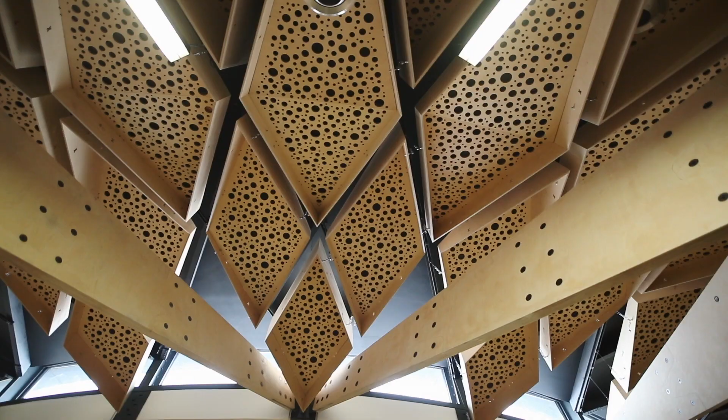At Future Africa, we supplied all of the fixed and most of the loose furniture in all the different areas, mostly the residential living units, and at the conference center we did acoustic paneling and tables.

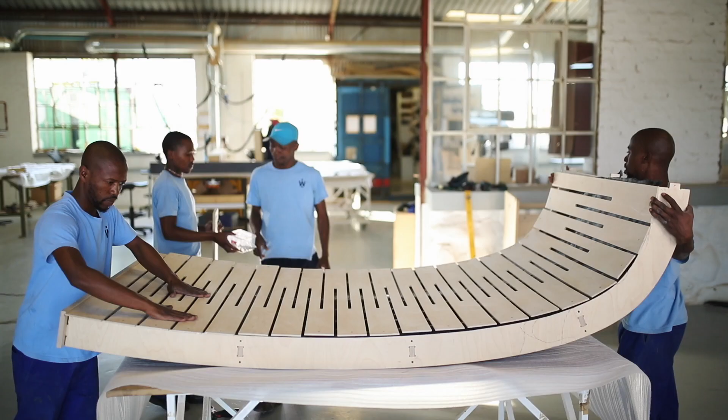Our approach was to develop and manufacture everything off-site. We want to spend as little time on site as possible and have as little interfaces with other contractors. So we wanted something very light, contemporary, with very simple shapes.

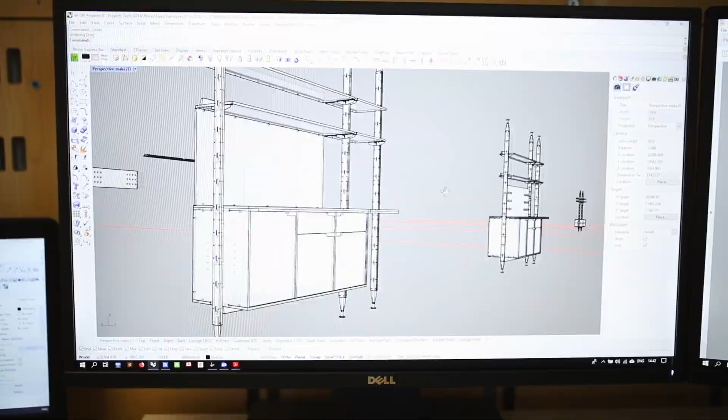The whole system consists of 4 basic components: a leg component, a panel, a box, and a shelf. With those 4 components we basically created all the solutions on site. All of the components would be manufactured, assembled and installed, which tied in very well with what the architect was trying to do with prefabrication, digital fabrication, etc.

So we are FUNKT Woodwork and we did all the built-in furniture at Future Africa Complex. The big challenge initially was making all the elements modular so that we can build as much as possible off-site and install it in as quick a time as possible. I think that was the biggest challenge.

It felt nice to be part of what is happening on the architectural and interior front in Pretoria, especially on a large project like this.

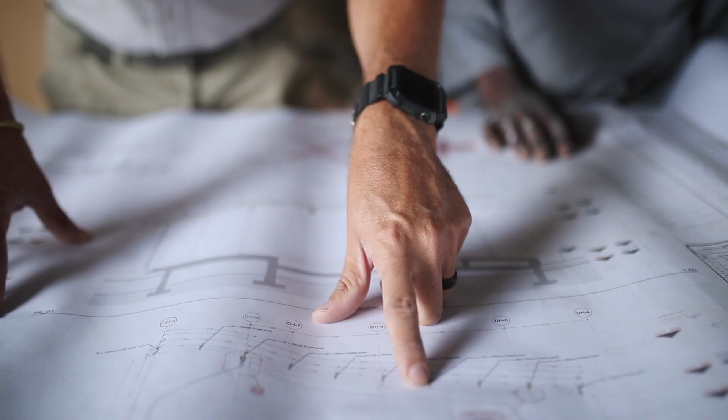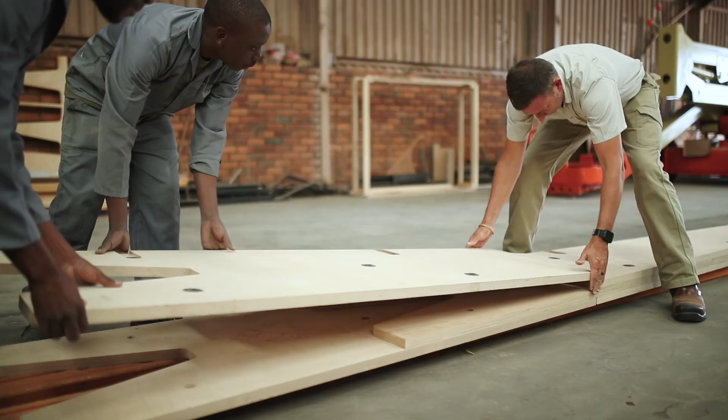André Eksteen wanted us to build a modular structure for the Future Africa campus. They wanted a dining hall construction. I've got a small company and a few guys working, none of them trained to be carpenters or whatever. With this project, the challenge was managing the architect's brief and merging it with unskilled labor.

The African system is about people, whereas the westernized system is maybe about systems where people are subject to the systems. At Future Africa, I think we achieved that very well by working together with and assembling thousands of small components with unskilled labor, and we managed to create a sculpturally very successful building. It's beautiful in its landscape, and I think it's inspiring for the people that live here.

We see enormous potential for Future Africa. We really dream of it changing our university, playing a big role in changing our country, and ultimately giving a platform through which our continent changes the world.